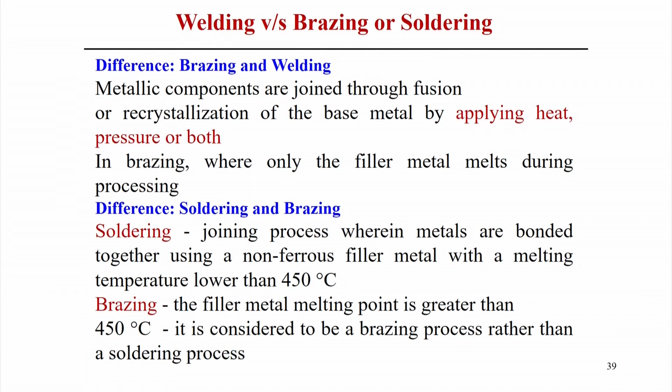In soldering, the temperature should be below 450 degree centigrade. The mechanism for brazing is the same, but the filler material is different since it can be operated above 450 degree centigrade. So in soldering and brazing, we use filler materials having different melting point temperatures: below 450 degree centigrade in one case, above in the other. That is the boundary in terms of temperature that differentiates soldering from brazing.

Of course, when temperature differentiates soldering from brazing, the applied filler material should also be different in these cases.

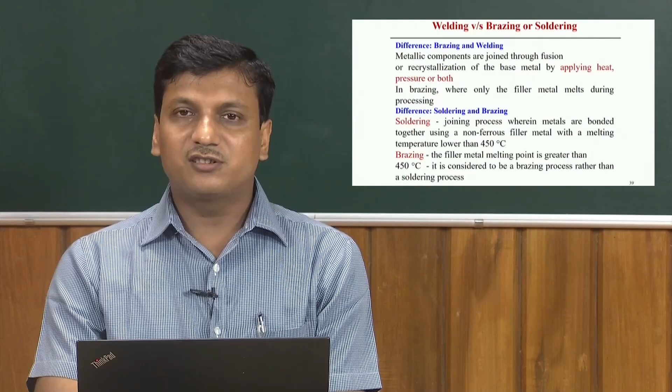Now we will try to get some basic idea about the soldering and brazing process. We can start with the brazing process. So what is the brazing process? Brazing is a production and cost effective process, and in this case, two dissimilar or similar kinds of materials can be joined without much effect of heat on the base material.

So in that sense, with respect to the fusion welding process, the brazing process is more cost effective. There may not be any component distortion, or distortion is minimized or can be eliminated, because only the filler material is melted and subsequently solidifies, but it does not melt the base material. Because of that, the distortion level in this process is relatively less compared to the fusion welding process.

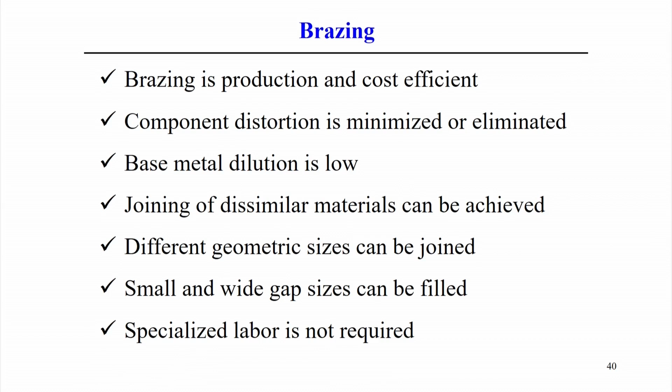Other significant points of brazing: the base metal dilution is low, because the base metal is affected by heat, but there is no change of phase from solid to liquid. That is why the dilution level is low in this process, and several dissimilar combinations of materials can be achieved using the brazing process. That is one typical advantage of this process.

Of course, in these cases the joint strength may not be as efficient as in the fusion welding process, where two dissimilar materials can be joined using other fusion welding processes. Different geometric sizes can also be joined.

So the joint simply uses the gap between the materials filled with filler material. The braze filler metal is required to fill that gap between the two materials, and after filling with the liquid metal, the two solid metals can be joined. That is the basic principle of the brazing process.

So small and wide gap sizes can be filled. In certain cases, the gaps vary from very small to very large between the two workpiece materials, and these can be filled by the brazing process using filler materials.

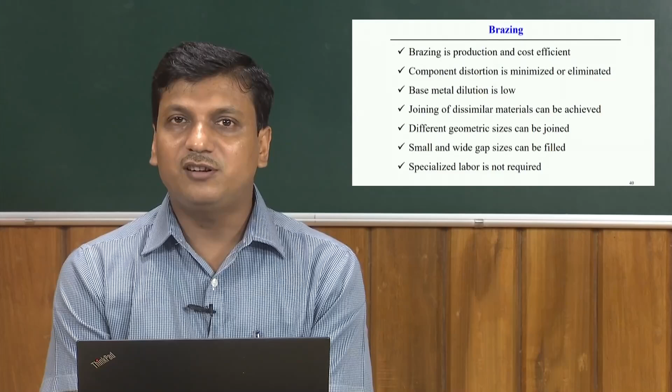And in this case, there is no requirement of specialized labor, because the brazing process can be done manually or can be converted to some kind of automated process. With this typical advantage of the brazing process, we can look further into the brazing process.

First, we will discuss the principles of the brazing process. Brazing is the process when a filler material or alloy is heated to its melting point temperature, which should be above 450 degrees centigrade. The liquid metal then distributes between two or more close fitting materials, or where there is a gap or variable gap between them. Between the two close fitting materials, the liquid metal sticks to the solid metals simply by capillary action, or filling by capillary action.

This filler material is brought not too much to a superheated temperature, rather a very low degree of temperature increment with respect to the melting point of this filler material.

So it then interacts with the thin layer of the base metal. Basically, the total heat content of the liquid braze metal, when it interacts with the solid metal, affects only a very small thickness of the material, because the difference of melting point between the base metal and the braze metal is huge. So in that sense it is only effective on a very thin layer of the metal, and that acting between the base metal is simply the principle of wetting of the solid material at a certain temperature.

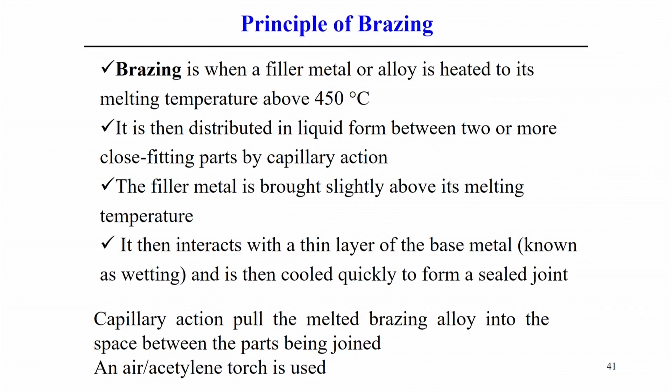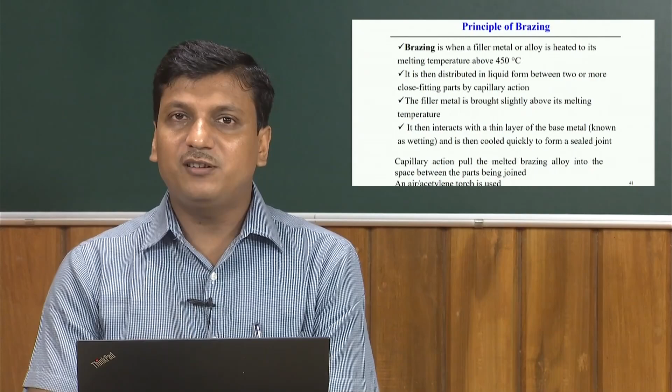So, a little higher than the melting point temperature is followed in the brazing process, because that makes the wetting action between the two base metals, while at the same time not affecting the base metal too much with the amount of heat. To avoid much effect of heat on the base metal, the temperature increment is kept just above the melting point temperature of the brazed alloy.

So, in general, let's look at the typical advantages and disadvantages of the brazing process. First, the advantages: it can join any kind of dissimilar materials or dissimilar metals. The bond line between these two dissimilar metals is very neat in appearance.

The main point is that in the brazing process, it does not melt the base metal. Therefore, it allows much tighter control over tolerance limits without the need for secondary finishing. That is one advantage - in brazing, secondary finishing operations may not be required, which is sometimes needed in other welding processes.

There is also no distortion, or almost no distortion, in this process, and brazing is also applicable to join non-metals. For example, ceramics can be easily joined to each other by brazing, or ceramics can be joined with other metals simply by the brazing process. These are the positive sides, or typical advantages, of the brazing process.

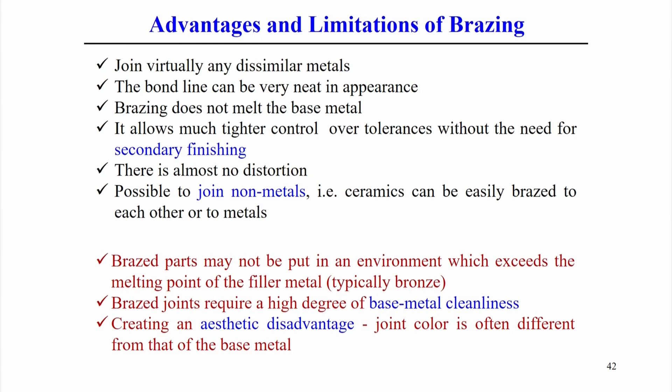But if you look further, there are also some limitations of this process. Definitely, the brazed joint cannot be used in a temperature environment that exceeds the melting point of the filler material, as it will then lose the strength of the joint. So the limitation of this process is that it should only be applicable, or the joint can only be used, below the melting point temperature of the filler material.

Of course, the brazed joint requires a high degree of base metal cleanliness, because if the surfaces are very clean, then the wetting action will be good. So, in that sense, the surface should be very clean to get a successful brazed weld or brazed joint.

Sometimes another typical disadvantage of this process is the aesthetic appearance of the weld joint. Sometimes the joint color is basically different from the base metal, and that brings some aesthetic disadvantage to this kind of joint. Apart from that, brazing is still one of the good solutions for joining dissimilar materials, if we do not compare the strength of this joint with respect to the fusion welding process.

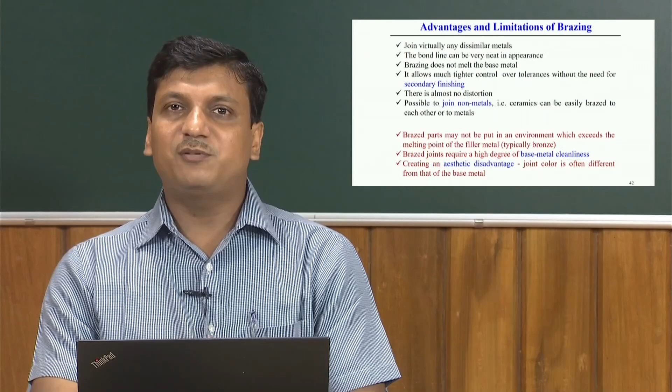Now, when you try to melt the filler material or braze alloy, there is a requirement of a heat source. So, what are the typical heat sources practically used for brazing purposes? Based on that, we can define different brazing techniques.

One is torch brazing. In this case, a fuel gas flame is basically used, like acetylene, hydrogen or propane, to heat the brazed alloy material.

So, what are the typical applications? When there is a tube that needs to be fitted into other components, using copper or silver brazing filler metals, we can use this. We generally use an oxy-fuel torch as the heat source, and that can be easily controlled locally to a specified zone by simply focusing the torch on that specific position.

Induction brazing is another kind of technique, where induction means we generally use electric coils to heat the part as well as the brazing filler material.

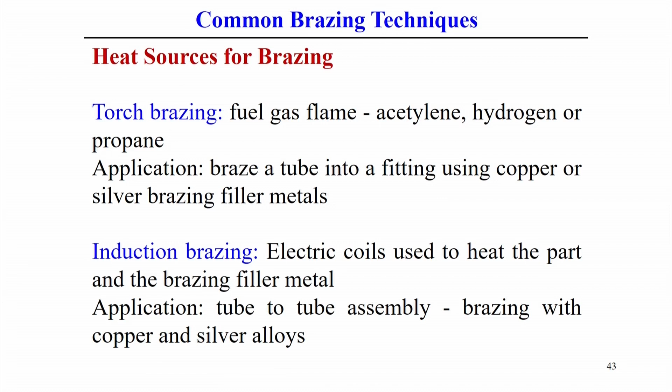In this case, when there is a tube-to-tube assembly, brazing can be done with copper and silver alloy between these two tubes to join them. So, in induction heating, electric coils are used, and in this case it is a more controlled way to produce the amount of heat, or control the temperature of the filler metal, as compared to simply the torch brazing process.

Another brazing process uses a continuous furnace. There is a sequence of preheating through the sample to assemble different components using brazing techniques.

In this case, sometimes continuous furnaces are used. The terms basically used are preheating of the material, then heating, and after that post-heating zones, which can be controlled using the continuous furnace in a sequential way. And of course, the braze alloy in this case also reaches the melting point temperature and then resolidifies during the cooling process.

So silver and copper based brazing filler metals, silver and copper based alloys, are basically used for most of this assembly by this brazing technique.

Another type of brazing technique is basically the vacuum furnace. We use the vacuum furnace also for the brazing process. In this case, a furnace with electrically heated elements, which is basically part of the furnace, generally operates

under vacuum. So what happens in this case is that the flow and flowability of the liquid braze alloy and capillary attraction are also achieved when you use vacuum furnaces for the brazing alloy.

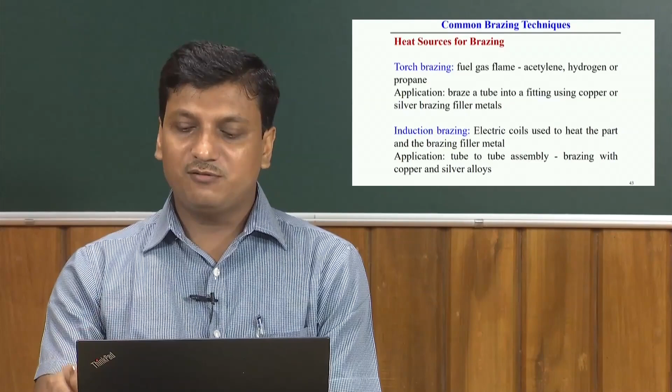So, if we consider all these different brazing techniques, the most simple application is torch brazing. Induction brazing is the more controlled approach where we can control the temperature. Then continuous furnace and vacuum furnace are also other brazing techniques.

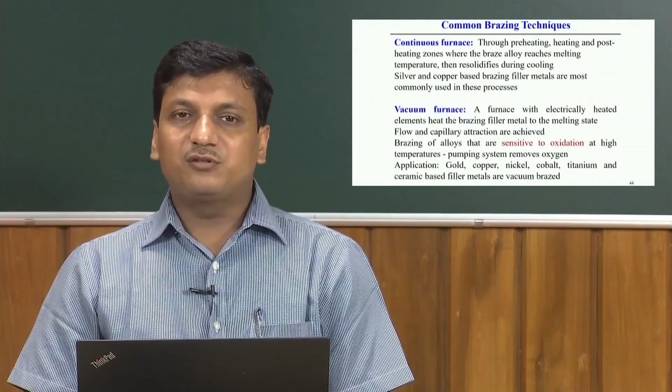In the continuous furnace, it is open to air, but in this case we typically follow a sequence: preheating, heating and post-heating zones, these three zones are basically controlled using the continuous furnace.

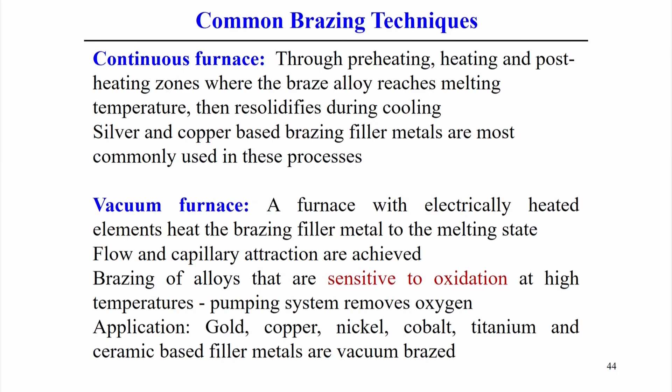Vacuum furnace is a simple way of taking advantage of avoiding contamination during the process, to avoid contamination with the surrounding atmosphere. In this case, generally the vacuum furnace is required.

Apart from the various brazing techniques, now we come back to the soldering process. First, we start with the principle of the soldering process. The principle is more or less similar to the brazing process, but there is a minute difference: the filler metal used in soldering must have a melting point temperature below 450 degrees centigrade. So the filler materials may be different as compared to the brazing techniques.

Flux is normally applied to the faying surface and then the surfaces are heated. Solder is added to the joint and distributes between the closely fitted surfaces. In this similar principle, the solder material is distributed through the surface, and upon application of heat to the filler material, it melts and wets the surface of the solid surfaces. So in that principle, the soldering process basically works.

But a main significant difference with respect to the brazing process is that the strength of the soldered joint is much lesser than the weld joint, and even less than that of the braze joint. However, the application or applicability of the soldering process is different as compared to the brazing process. From the figure, this can be better explained.

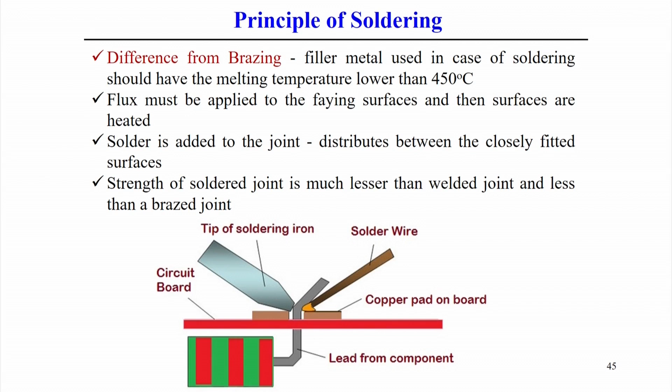So the applicability of the soldering process is developed based on easy connectivity of different components of materials, either similar or dissimilar combinations, where electrical connectivity is the main significant factor, but mechanical strength may not be significant in this case.

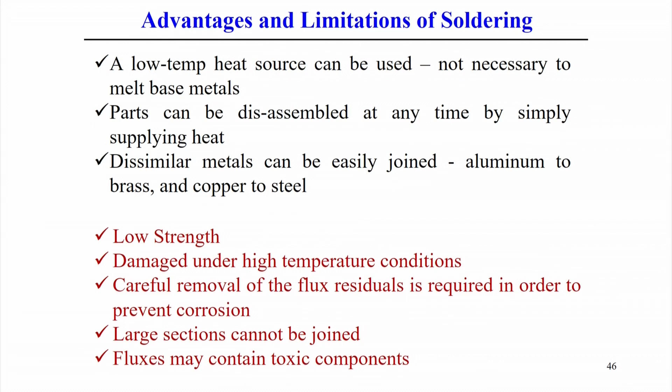Based on the applicability of the soldering process, we can find some advantages and limitations. Soldering uses a low temperature heat source; the heat source is not required to melt the base material. That means a low intensity heat source can be applied exactly on the soldering wire, where it is supposed to melt the soldering wire, not the base material.

Parts can be disassembled after joining at any time by simply applying heat, and this heat does not affect the base material much. So disassembly is also possible easily, and dissimilar materials can be joined easily, for example aluminum to brass and copper to steel.

These dissimilar combination materials can be joined using the soldering process, but we cannot expect much strength of this joint compared to normal fusion welding or solid state welding processes, or even brazing processes. So a typical limitation of the soldering process is that the strength is very low, and it may be damaged under high temperature conditions.

We try to localize the amount of heat applied, and the heat intensity should be low enough so that the temperature is controlled below 450 degrees centigrade.

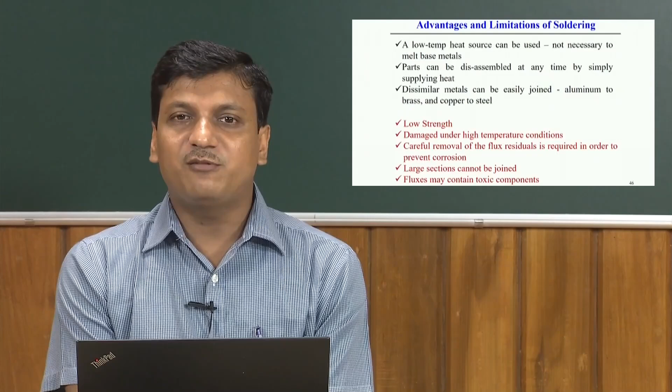Sometimes the flux contains lead, which is a toxic component and may not favor green manufacturing technology. So, in that sense, we try to avoid using such kind of fluxes.

Apart from this, there are several advantages and limitations of the soldering process, but still some development of the soldering process happens. So, if we try to look into this process, we can first look into what are the soldering tools. Typical soldering tools in this process are soldering iron, fluxes, solder wire or stick, and spelter, which are also used in this process.

Soldering iron basically consists of a copper bit attached to an iron rod at one end, and at the other end it is attached to a wooden handle so that it can be held. Then it is used to melt the filler material, and at the same time it can be used to paste that filler material to make the joint.

That is the basic principle, and we have seen this soldering process is practically applicable. Practically we can see this soldering process very frequently in the connectivity of the electrical circuit board.

Most solder metals are an alloy of tin and lead. The percentage of lead is kept limited because of its toxic properties, and nowadays some other solder metals have been developed also to avoid using components like lead.

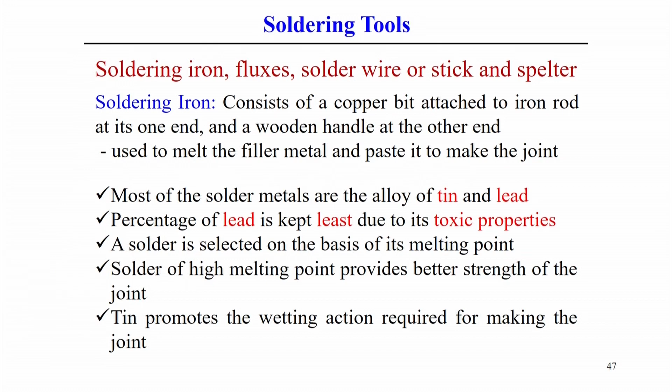A solder is selected on the basis of its melting point, and the melting point is relatively on the lower side, typically less than 450 degree centigrade. But solder of higher melting point, up to the limitation of 450 degree centigrade, can provide better strength of the weld joint.

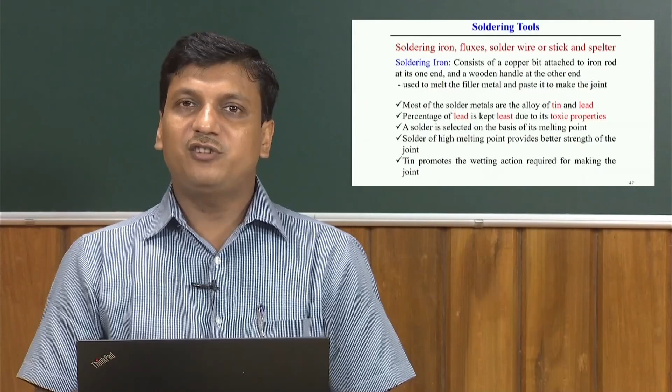Tin promotes the wetting action required for making the joint. Basically, the purpose of using tin is that its melting point temperature is low, and it nicely creates that wetting action when you try to join the two material components.

Now, types of solders. Here we generally observe two types of solders: soft soldering and hard soldering. Soft soldering is used for joining small intricate parts having low melting point filler material.

Tin-lead alloy can be used as filler material, with a melting point below around 400 degree centigrade. In this case, to locally melt that filler material, we generally use a gas torch as the heat source. So typically, soft soldering operation is done at temperature below 400 degree centigrade.

Accordingly, we can choose different filler materials, and to melt the filler material we use a heat source that can be applied locally, so that it should not affect the base metal much, meaning the maximum temperature of the system can be kept below 400 degree centigrade. On the other side, there is hard soldering, which is sometimes also called the brazing process.

So definitely, hard soldering can also be called the brazing process. In this case, joints of two metals can be made at relatively higher temperature, and the filler metal used should have a melting point above 450 degree centigrade.

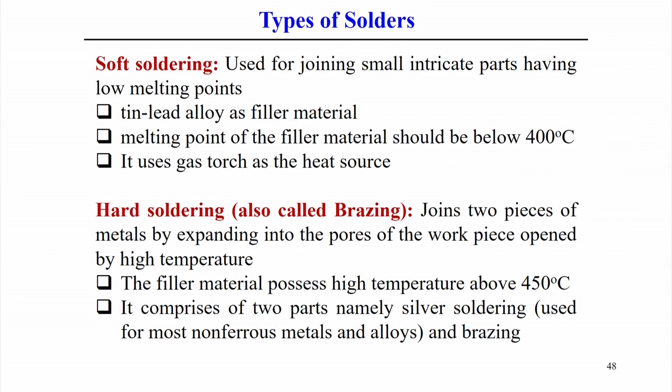Brazing is defined in terms of the temperature as well as the filler materials used for the brazing purpose. Normally, what we call soldering in general is soft soldering, and hard soldering is generally considered part of the brazing process.

Now we look into the different soldering techniques. There are several techniques that exist, depending upon the type of heat source, the use of different kinds of filler materials, or based on different methods.

If we look into the different soldering techniques, we can find torch soldering, furnace soldering, resistance soldering, dip soldering, and infrared soldering.

These methods are common to both soldering and brazing processes, but typically if we look into that, what are the different soldering processes, what are the different methods of soldering.

First is hand soldering. Hand soldering means small joints can be done in a very short time period.

Typically hand soldering means it is done manually using the soldering iron, and this method is mainly used for repairing purposes, since it is done only manually.

Wave soldering is used when there is a requirement of large scale soldering process. In this case, electronic components on the printed circuit board are joined using this technique, generally doing only the electrical assembly of different components. Typically the metal circuit board to metallic components are joined using this kind of soldering process.

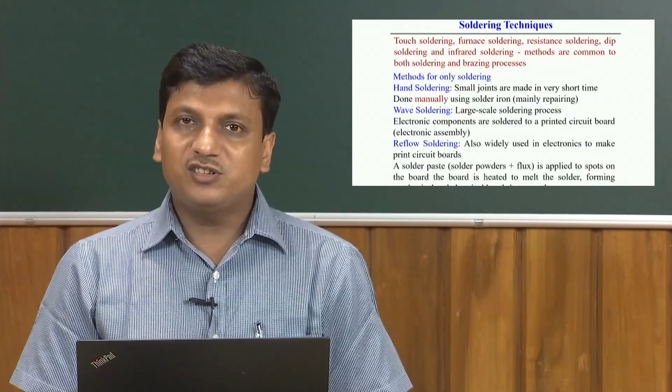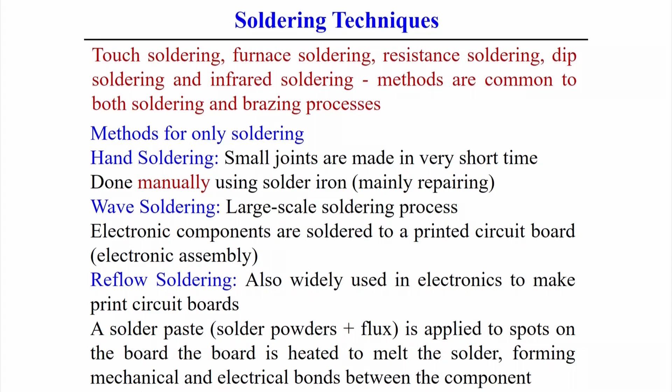In reflow soldering, the importance is not only electrical connectivity - both mechanical strength and electrical connectivity are achieved in a very organized way. In that sense, reflow soldering is basically different from the wave soldering process.

After discussing the different welding processes and the principle of fusion welding, then we discussed brazing and soldering, another joining process. Now we will discuss adhesive bonding, which is also one kind of joining process. We will look into the basic principle of the adhesive process and what different methodologies and techniques can be used in case of adhesive bonding.

So what is the principle of adhesive bonding? In adhesive bonding, it is the joining process in which a filler material is used to hold two or more components, closely spaced parts, together by simply surface attachment. In principle, this is different from the fusion welding process or soldering or brazing process.

Here the joining between the two components is done using some other type of filler material - the adhesives - with or without the application of heat; heat may or may not be necessary. In that way, this is different from any kind of fusion welding process or brazing and soldering process.

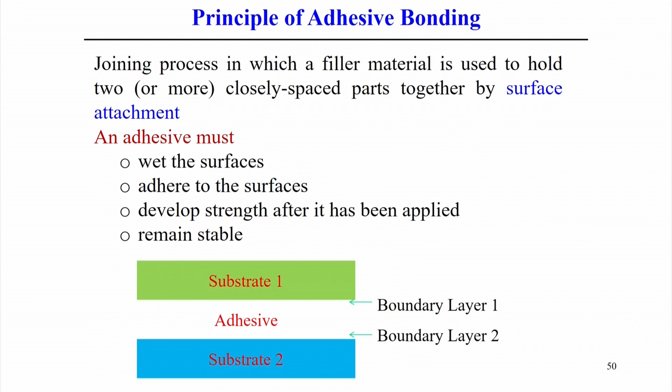Therefore, the adhesive used should have some quality such that it will wet the surfaces - both the surfaces we are supposed to join - and it should exactly adhere to the surfaces and develop strength after it has been applied.

That means sometimes simply putting the adhesive requires it to be held for a long time, which is called the curing process. After curing the joint between these two surfaces, simply wetting the surface, this joint should remain stable after a certain period of time.

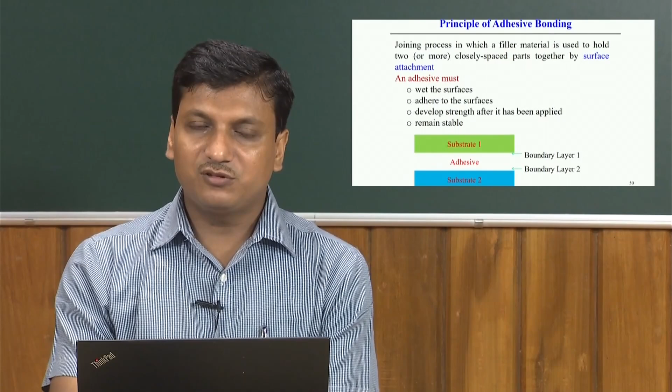So, adhesive bonding happens, but to get a successful joint using adhesive bonding, this process can be explained in two terms. One is the surface preparation and the curing. These are the two significant terms. Based on that, adhesive bonding can be explained in a better way.

First is surface preparation. Definitely the workpiece surface, like in the fusion welding process, to get a successful weld joint, it is necessary to clean the surfaces of the workpiece or substrate material before welding. Similarly, here also some surface preparation is necessary to get a successful joint with the application of adhesives.

Part surfaces must be extremely clean because the bond strength actually depends on the degree of adhesion between the two surfaces, the adhesion between the surface and the adhesives and the parts, which is very much linked to the cleanliness of the surface. Therefore, an extremely clean surface is required in this case.

Second, other points for surface preparation: how it can be done in case of metals and in case of non-metals. In case of metals, we use solvent wiping, often used for cleaning purposes, and then roughening of the surface is also required. Sometimes sandblasting techniques are required to improve the surface roughness of the material.

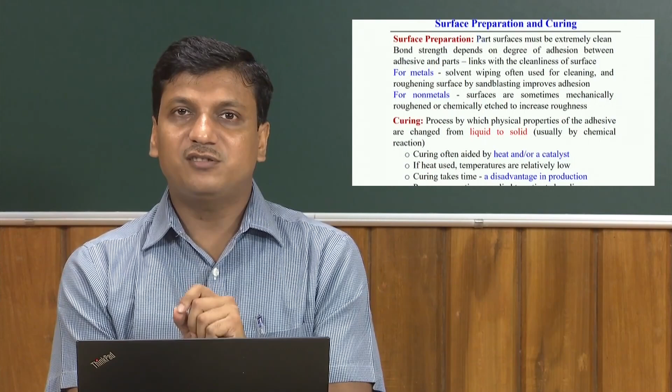Next is curing, another component of the adhesive bonding process. This is the process by which the physical properties of the liquid adhesive change when it changes to the solid phase. That comes usually by some chemical reaction. In this case, the curing can be done carefully in the adhesive bonding process.

It is often used with the aid of heat sometimes, or sometimes we can use some catalyst for the curing purpose of the adhesives. If there is a need for application of temperature during curing, that temperature may not be too high; it should be relatively low.

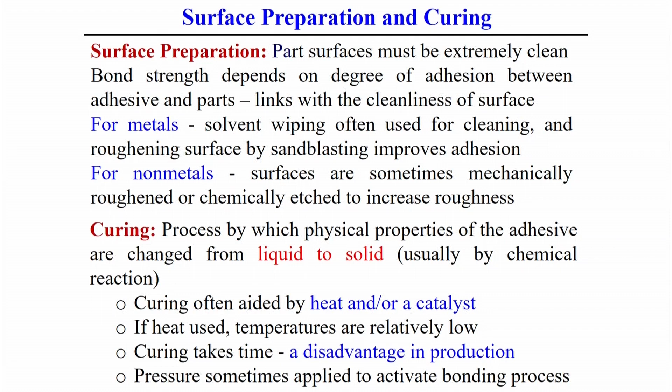But the main disadvantage of this process is that curing time is relatively long, so the production rate is relatively slow in this case. That is the disadvantage of this process. Sometimes it requires applying pressure also, which activates the bonding between the two substrate materials.

Now we come to the point of the typical methods of application of the adhesive, the way we can put the adhesive between the substrate materials. Simply, manually we can do brushing, but when done manually, there is a possibility of uneven coating, meaning there is a variation of thickness over the surface. So that is one method, simple brushing.

Sometimes we can use a manual roller similar to a paint roller; in this case we can maintain the smoothness of the surface, but since it is done manually, there may still be a possibility of variation in thickness.

Silk screening is sometimes another methodology for application of the adhesives, simply brushing through the open area of a screen, which is used to coat a selective part or selective area of the component. So this method is sometimes applicable for application of the adhesives.

And flowing: usually a manually operated flow gun is used, which is required when consistent control is needed, and this is advantageous as compared to the simple manual brushing process. So these are the typical methods for application of adhesives to the substrate material.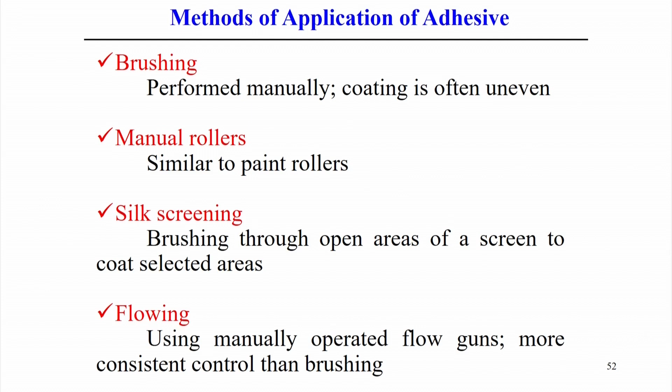So, after application to the substrate material, there may or may not be a need for pressure, the aid of temperature, or sometimes we use the adhesives along with some catalytic element, so that it can accelerate the chemical reaction during the process, so that curing can be done.

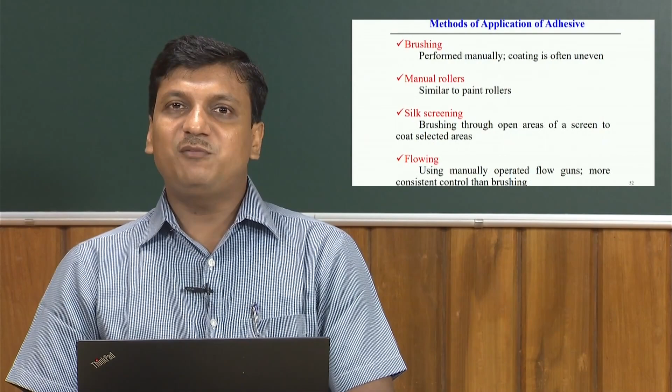That means the change of phase from liquid to solid phase can be done quickly also. Now, if you look into the typical failure modes on adhesive bonding, after making the bonding, what are the typical failure modes of adhesive bonding?

There are three possible mechanisms. One is structural failure. Here we can see the internal failure of a substrate material in the region close to the joint. So failure is more to the substrate material with structural failure, not actually happening inside the components of the adhesive part.

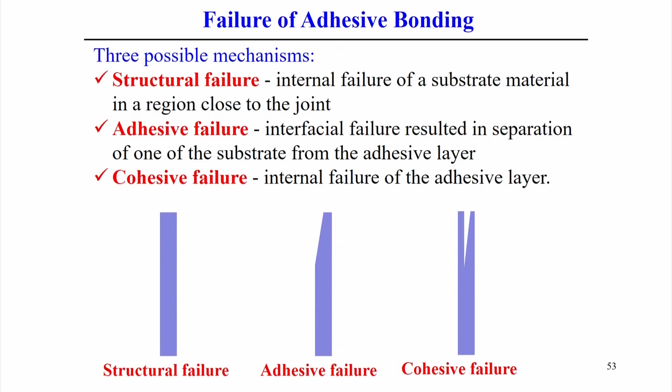Cohesive failure is when the internal failure occurs in the adhesive layer. If you look into that, the failure is completely within the adhesive volume itself - that is called cohesive failure. So these are the three different types of adhesive failure modes we observe in case of adhesive bonding.

Now, classification of adhesives - what are the different types of adhesives that can be used? There are different ways to classify adhesive materials, but here we try to do the classification based on load carrying capability. Depending upon the load carrying capability, adhesives can be defined as structural, semi-structural and non-structural. These are the three different classifications based on load carrying capability of the joint using adhesives.

But to do that, one important point is the glass transition temperature, which is very much related to the polymeric material. That temperature decides that above which the polymer becomes rubbery, like chewing gum, where large deformation can occur, and below which it is like a glassy type of structure. So in polymeric materials, the important temperature is the glass transition temperature, which is maybe equivalent to the melting point temperature in case of metals.

So structural adhesives are basically relatively strong adhesives that are normally used well below their glass transition temperature. That means the adhesive structure looks like a glassy structure.

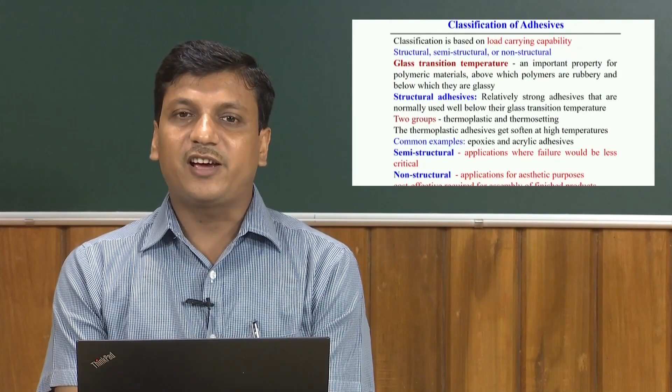So two groups - thermoplastic and thermosetting groups - they can be examples for structural adhesives. But we know that thermoplastics become softened at high temperature, while thermosetting plastics become harder with respect to temperature. Common examples of structural adhesives are basically epoxies and acrylics - these are the typical adhesives we use for joining of components.

If we look at semi-structural, this is the application where the failure would be less critical, so we can use semi-structural adhesives or semi-structural joints. Non-structural - strength is not important here; the application is done based on aesthetic purposes.

So if we look into these three different types of adhesives - structural, semi-structural and non-structural - based on load carrying capability, structural adhesive has good load carrying capability, semi-structural a little less, and non-structural even less, where importance is given to the aesthetic purpose of the adhesive.

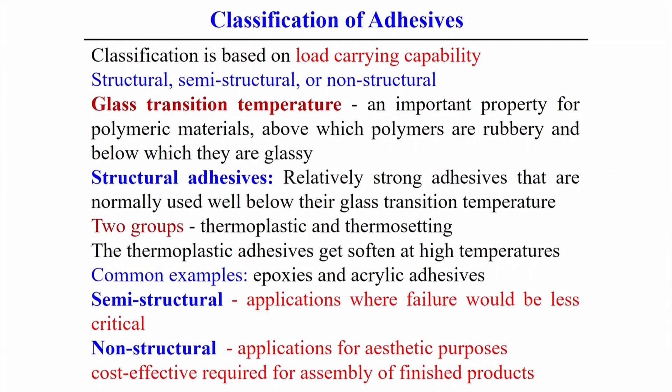So these adhesives are used for joining components, but if you look into the overall advantages and limitations of the adhesive joint, you can summarize like that. The ability to join dissimilar materials is one advantage for adhesive bonding, which is similar to other welding processes like brazing and soldering also.

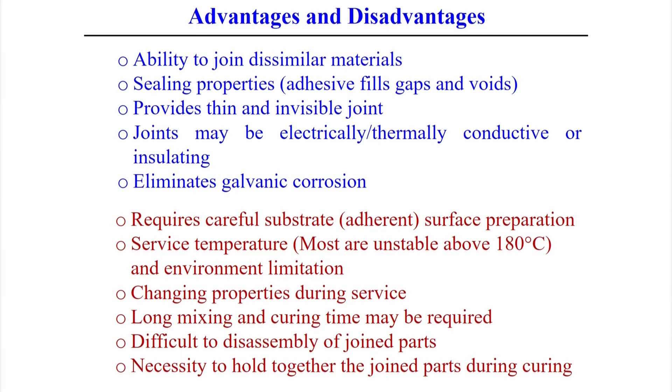Sealing properties - adhesives have good sealing properties because they generally try to fill gaps and voids. In most cases we use a very thin layer and get an invisible joint, but good joint strength can be achieved. Using additive agents, adhesives can be improved to be electrically or thermally conductive or insulating, whatever the requirement - that kind of flexibility is there using adhesive joints between components.

The adhesive joints actually eliminate galvanic corrosion. So using these adhesives, corrosion resistance can be improved during adhesive bonding, or if you simply use an adhesive layer upon any kind of components.

But if we see the negative side or disadvantage of adhesive bonding, the first is that it requires careful substrate surface preparation. Surface preparation is one important factor - cleanliness and roughness are the two important parameters for a successful joint using adhesive bonding.

There is also a limitation on service temperature, in most cases below 180 degree centigrade, and also environmental limitations affecting the service life of an adhesive joint. But the main limitation is the application temperature - above 180 degree centigrade the adhesive joint basically fails. That is the important limitation of this type of joining.

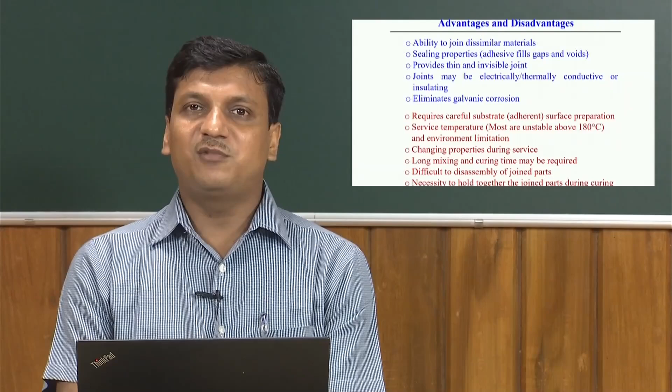So although adhesive bonding has several disadvantages, and even some advantages, sometimes adhesive bonding is a very handy process that we generally use.

Typical applications of adhesive bonded joints are found in automotive, aircraft, building products, shipbuilding, packaging industry, footwear, furniture, book binding, electrical and several electronics industries. We can find applications of adhesive bonding or adhesive bonded joints in these typical industries or fields.

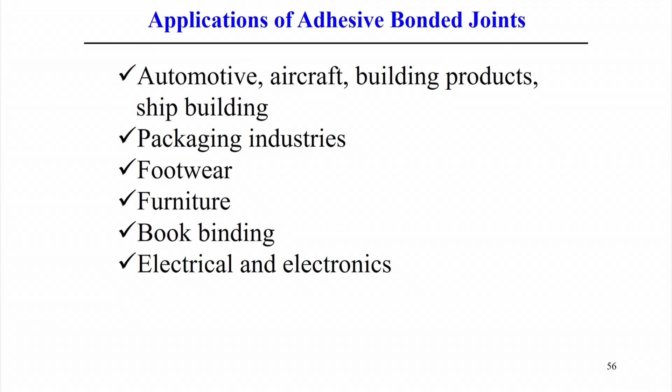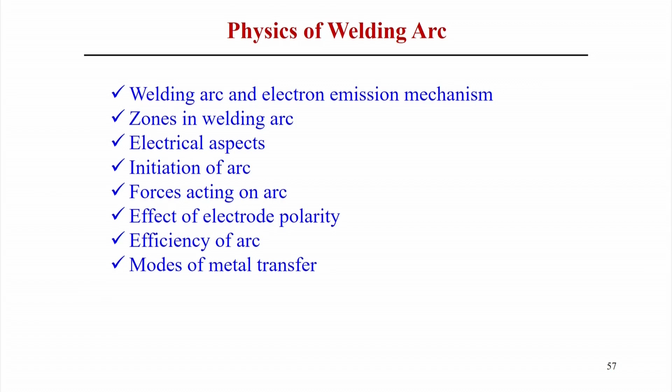Now, after adhesive bonding, we will come back to the physics of the welding arc. Here we will focus on the basic welding arc, electron emission techniques or mechanisms, the different zones in the welding arc, typical electrical aspects, initiation of the arc and forces acting on it, effect of electrode polarity, efficiency of the arc, and modes of metal transfer. These are the typical topics related to physics of the welding arc we will cover in this module. So here we first start with the basics of the welding arc.

In arc welding process, the arc develops due to the flow of current, and charged particles should have reasonably good electrical conductivity. That is the main principle of the welding arc - it can be represented by charged particles and movement of particles within the arc itself. These charged particles can be generated by three different theories.

The first is thermoionic emission. If we try to increase the temperature of a metal, and if the temperature is sufficient enough, the kinetic energy of the free electrons increases, and it comes out from the metal, then flows through a potential difference if there is a voltage difference. When it crosses a critical amount of energy, electrons get ejected from the metal surface and come out through a specific channel within a potential difference.

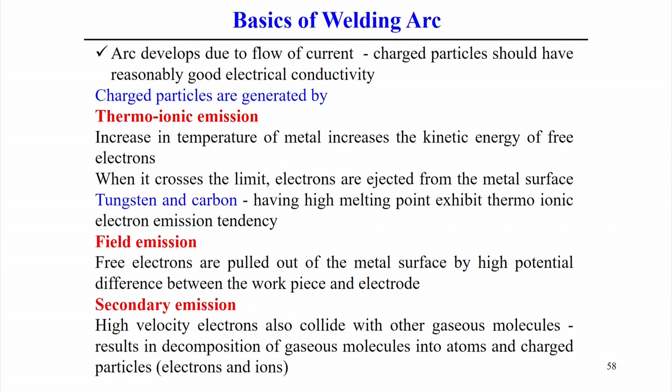So with these three basic mechanisms - thermoionic emissions, field emissions, and secondary emissions - the basics of the welding arc can be better explained.

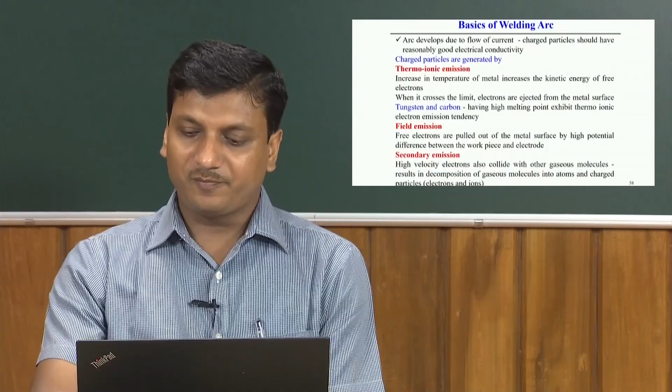Now if we look intuitively at the different zones in an arc gap, first is the cathode spot, which is the zone from where electrons are emitted from the cathode. First the electrode is there, and from the electrode there is this component called the cathode, and the cathode drop zone.

So a certain zone from the cathode is basically called the cathode spot, and from here to here is called the plasma zone. This component is the anode drop zone, and this is the workpiece that works as an anode here, and this is the molten metal where the arc is created and tries to melt the workpiece surface.

So if we look at the different zones acting between the electrode and the workpiece when you create the arc, we find the different zones: first the cathode spot, then cathode drop zone, then plasma zone, anode drop zone, and then anode spot zone. At the cathode spot, electrons are emitted, and at the cathode drop zone, the voltage drop affects the generation of heat and melting rate of the electrode.

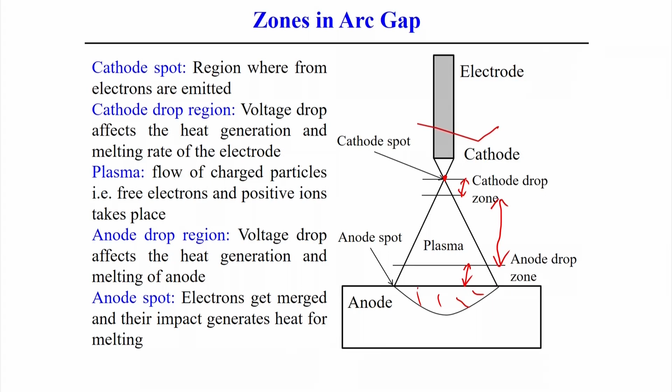And the anode drop zone - the voltage drop there affects the heat generation and melting of the anode. Finally, at the anode spot, the electrons get merged and their impact generates heat for melting. So basically these two voltage drops, at the cathode drop zone and anode drop zone, decide the melting of the electrode, or the temperature of the electrode and melting of the workpiece, decided by the voltage drop in the anode zone.

That means the melting of the workpiece, or reaching maximum temperature of the workpiece, depends on the anode drop zone. And the plasma zone has charged particles, free electrons and positive ions that exist within it, and there may be some amount of voltage drop happening there too.

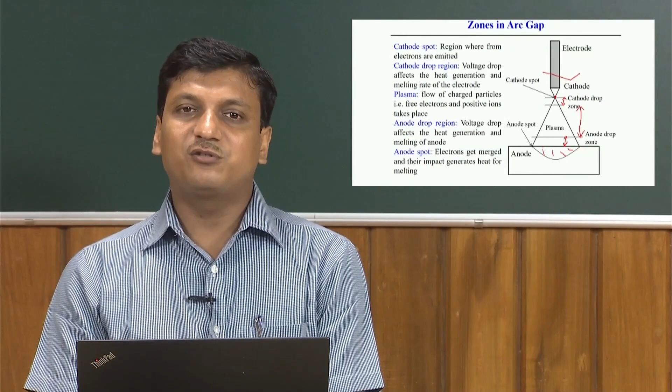So in terms of voltage drop, we can represent the electrical aspects of the welding arc - in other words, the welding arc can be represented as the effective resistance for flow of current in an electrical circuit. That effective resistance to the flow of current, and how that flow of electrons basically creates the amount of heat either in the workpiece or in the electrode material.

Resistance is a function of temperature, and it is inversely proportional to the density of the charged particles. Depending upon this current density, it actually decides the amount of heat generated in the anode or cathode.

In terms of voltage drop, we can divide the total voltage into three different components: the cathode drop, the plasma drop, and the anode drop zone. These three zones have different voltage drops, and that decides the final voltage.

Power of the arc is estimated from the total voltage drop between the electrode and the workpiece material, and the flow of current in this electrical circuit, which is created by the arc between the electrode and the workpiece. So V into I decides the power of the arc.

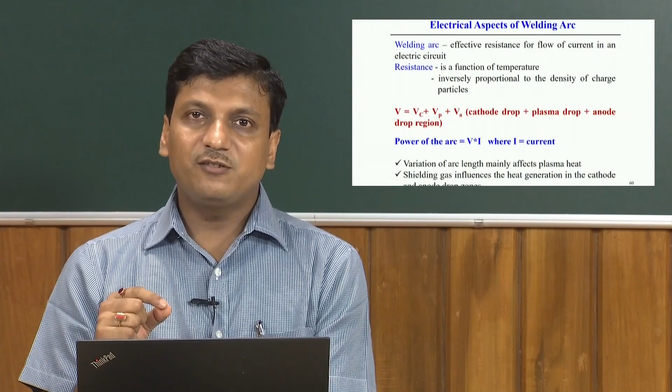Now, variation of the arc length affects the amount of heat generation because it alters the voltage drop between the cathode and anode. The nature of the shielding gas also influences heat generation, mainly impacting the cathode and anode drop zones through its interaction with the charged particles and electrons. This makes a very complicated phenomenon, which is represented simply by an electrical arc.

We can say that is a plasma arc, and to sustain this arc, an electrical circuit is needed, characterized by a certain voltage and current. It is possible to measure the resistance in this electrical circuit. Once we measure voltage and current, which can be controlled by the power source, that is the measure of the arc power.

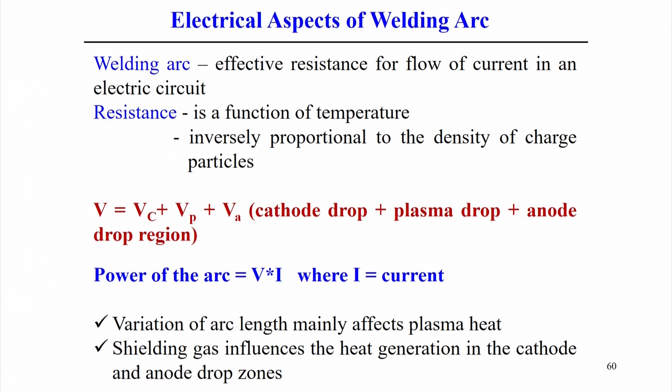Now looking into the arc, we try to look into the initiation of the arc - how the arc can be created. Initially, without application, there is a gap between the electrode and the workpiece that does not complete the total electrical circuit. So it is possible to first simply touch the electrode to the workpiece material or substrate, which creates the electrical circuit, starting the flow of current.

This is called touch start: simply touching the electrode to the workpiece material, starting the flow of current, then taking it away from the workpiece and maintaining a certain gap. By creating the arc, it maintains the circuit - continuous flow of electrical current - and that gap mainly decides the amount of voltage required for this electrical circuit.

In touch start, the electrode contacts the workpiece and then is pulled apart to create a very small gap. When you touch it, it creates a short circuit, resulting in heavy current flow initially, leading to heating, partial melting, and slight evaporation of the electrode metal. But pulling out the electrode then maintains the arc.

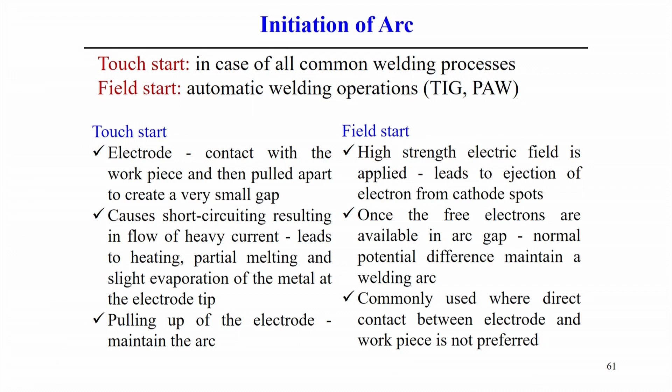Touch start is generally done in welding processes and is basically controlled manually. But there is another type of initiation.

This other type of arc initiation is called field start. Field start is mainly used for automated welding processes like TIG welding and plasma arc welding. In this case, a high strength electric field is applied, which leads to ejection of electrons from the cathode spot. Once free electrons are available in the arc gap, the normal potential difference maintains the arc.

This maintains the gap between the workpiece and the electrode. Field start is commonly used where direct contact between the electrode and workpiece is not preferred, or when there is a need for an automated process. We apply a high strength electric field so that even with a constant gap between the electrode and workpiece, we can start the flow of current within the circuit itself.

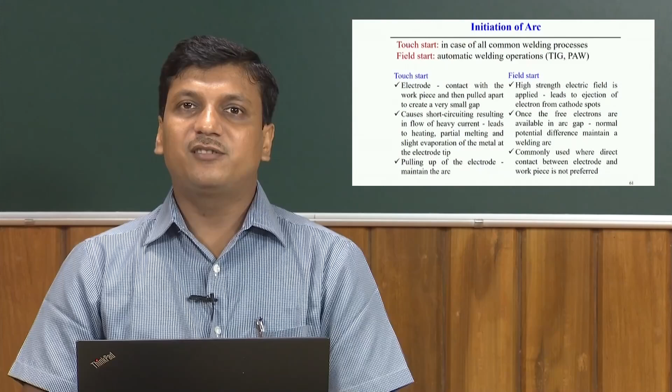So, that is called the field start.

Now, when you use the electrical power source in the arc welding process, there is a possibility to use either direct current or alternating current. In direct current, there is the possibility of how to select the polarity of the electrode and the workpiece. To understand this polarity, we need some basic idea about how, in which cases, we can link this polarity in terms of the generation of heat.

If we use direct current and consider the electrode negative and the workpiece as positive, the flow of electrons comes from the electrode to the positive workpiece. So when the flow of electrons comes from the electrode to the positive workpiece, the maximum amount of heat will be generated in the workpiece. Typically 70% of the heat will be generated at the anode and the remaining 30% at the cathode, for the DC-EN polarity, that means direct current electrode negative polarity.

In this case, the mass of the electron is much less than the mass of the ion, so it basically gets accelerated to high velocity and more heat is generated at the anode. That means when the electron is attracted to the positive workpiece and impacts on it, more heat is expected to be generated in the workpiece. So that is the principle.

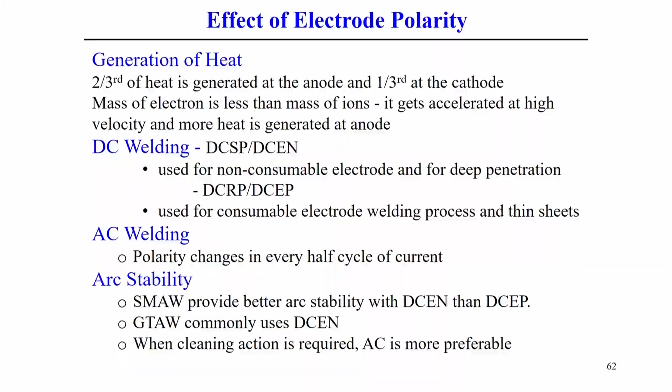On the other hand, direct current reverse polarity, or direct current electrode positive, can be used with a consumable electrode, because in this polarity the maximum amount of heat is generated on the electrode, not the workpiece. Using a consumable electrode, the intention is to melt the electrode material, that is the main requirement. At the same time, less heat is generated in the workpiece material, which also melts, but it is more about controlling the melting of the electrode material.

So normally direct current electrode positive is used with consumable electrodes, and in this case it cannot create very deep penetration. So thin section materials can be welded using this DCEP polarity.

Now, AC welding, alternating current, can also be used in the power source. When there is a change of polarity in every half cycle of the current, then AC current is used. A typical example is aluminum. When you try to join aluminum or aluminum alloy, the more preferable choice of polarity is AC current in this case.

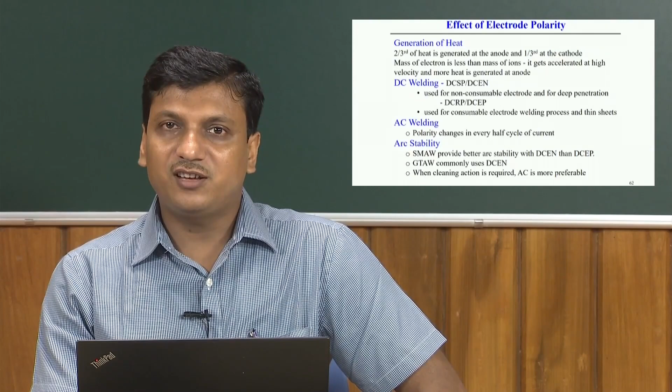Now, how to estimate the arc efficiency? Heat loss may be mainly due to the application of heat that comes from the creation of the arc. One amount of heat is conducted ahead to the base material, but at the same time heat is lost due to convection and radiation from the workpiece surface to the surrounding. Therefore, only a part of the generated heat from the arc is actually used to melt the substrate material. Based on that, we can find out the arc efficiency.

Arc efficiency can be defined as the ratio of the heat generated at the anode and the total heat generated in the arc. This ratio basically defines the arc efficiency, but this is in the case of using non-consumable electrode materials.

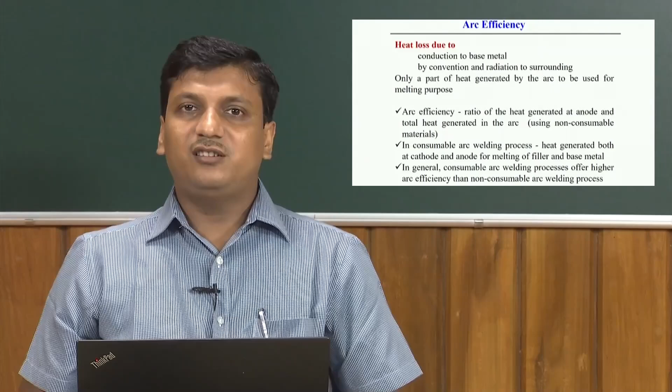This is the definition of arc efficiency, but if we consider the consumable arc welding process, heat is generated at both the cathode and the anode. That means it is melting the workpiece material, melting the filler material or consumable electrode, and at the same time it melts the base material also. So in this case you need to count the amount of heat generated in both cases, and in that sense the arc efficiency in this case will be more. In general, the consumable arc electrode process offers higher arc efficiency than the non-consumable welding process, that is, when you use the non-consumable electrode.

Now, what are the different forces acting on the arc zone? When you try to analyze the mode of metal transfer when using the consumable electrode, it is necessary to consider the different forces acting on the arc zone. First is the gravity force, which acts on the molten metal drop, and that can be estimated from the density and volume of the drop and the acceleration due to gravity. So gravity force is one kind of force that influences the metal transfer.

Second component is the force due to the impact of charge carriers. This acts by charge particles on the molten metal drop at the tip of the electrode, and this force due to the impact of charge carriers tends to delay the detachment of the droplet. So this is another force.

Other forces are due to metal vapor, which always comes in the upward direction and acts against the molten droplet at the tip of the electrode. Finally, the other force is due to the magnetic field. Interaction of the electromagnetic field with the charge particles produces a force that tends to pinch up the drop at the tip of the electrode, and that is called the pinch force. So the electromagnetic field creates the pinch force, and the pinch force basically affects the detachment of the drop from the molten electrode.

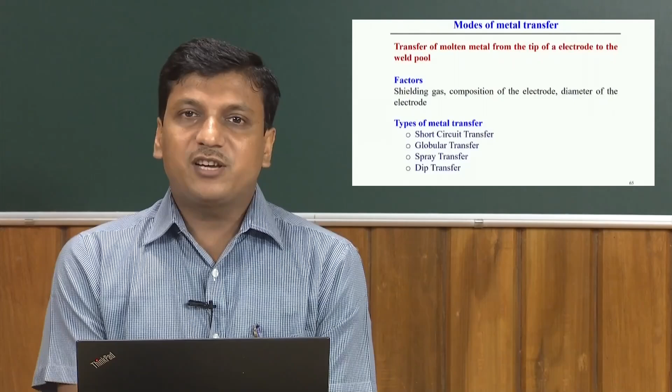Based on that, different forces are linked to the metal transfer in gas metal arc welding or any kind of shielded metal arc welding process. The metal transfer happens from the tip of the electrode, and apart from these different driving forces, the typical secondary factors are the shielding gas, composition of the electrode, and diameter of the electrode, which also influence the metal transfer.

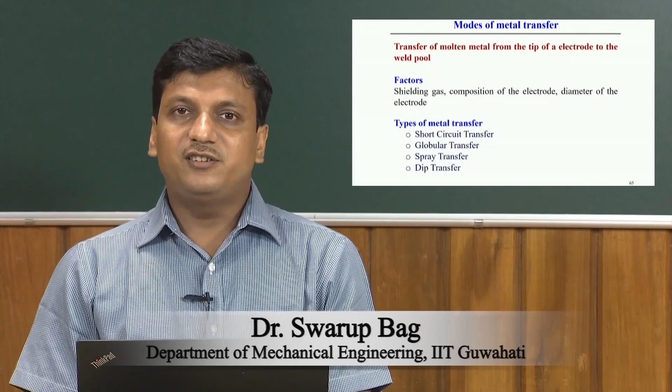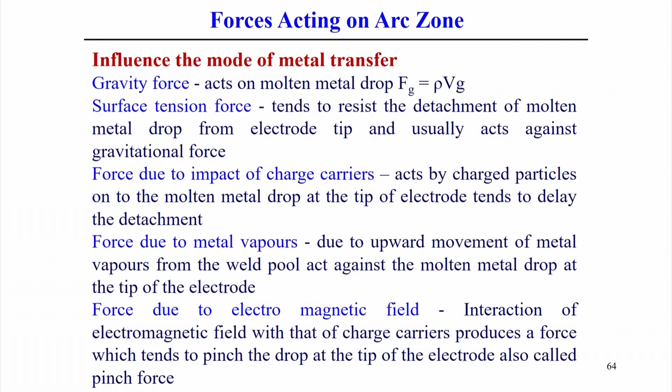If we look at the different types of metal transfer normally observed in the fusion welding process: first is short circuit transfer, second is globular transfer, third is spray transfer, and finally is the dip transfer. All these types of metal transfer are governed by the different forces acting during the welding process - gravity force, surface tension force, electromagnetic force, and force due to metal vapor - and this creates a very complex impact on the different modes of metal transfer in the arc welding process.